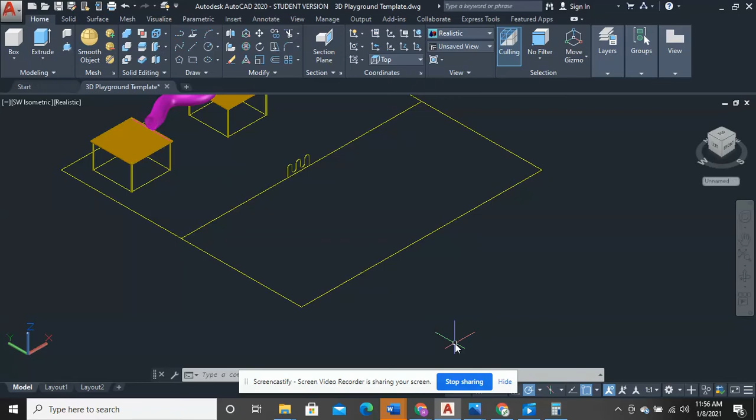So this is a second video for 3D basics. And what I wanted to talk about in here is some 3D do's and don'ts.

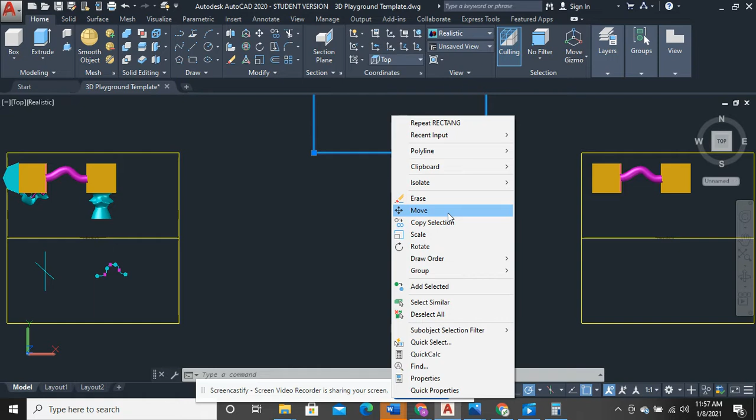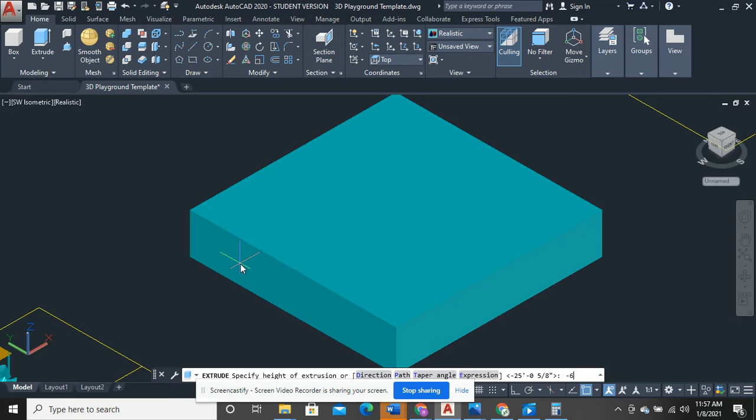I'm going to go down to a southwest isometric view. What I did was I extruded this, maybe 6 inches. Now you can see that this has thickness, and this is really the first tool I'm going to talk about: the Extrude Tool, the most basic tool that we have.

Here's realistic view, and I'm going to go to 2D wireframe. Now you can see that this playground surface has thickness, like a piece of concrete or something else. I covered this in the last video as well.

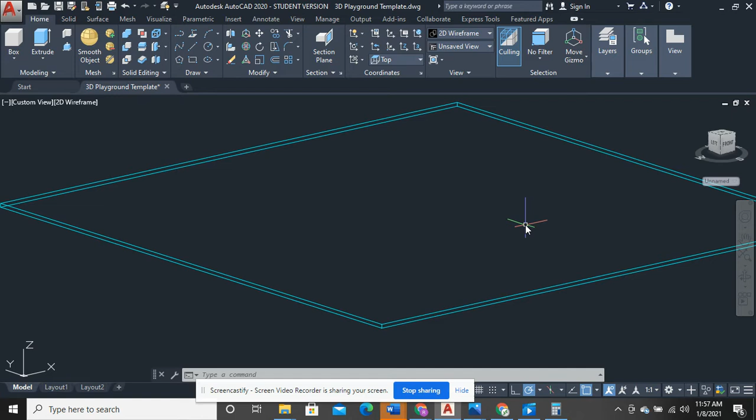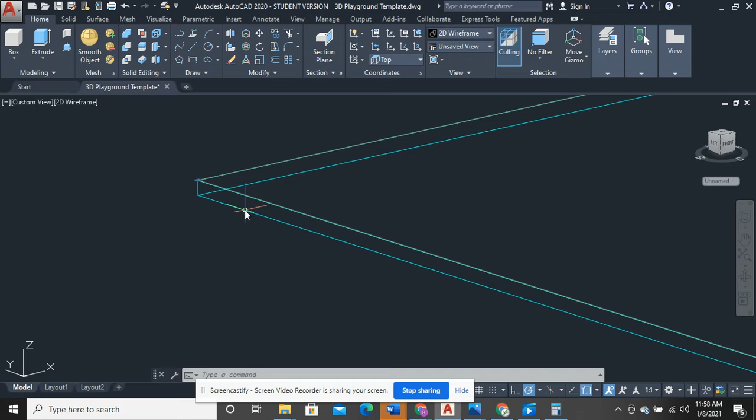What I said you'd want to do, the easiest thing, would be to use lines and go right along the top of the playground—the top surface of what you could call the concrete—making sure you're grabbing the top endpoints or intersections right there.

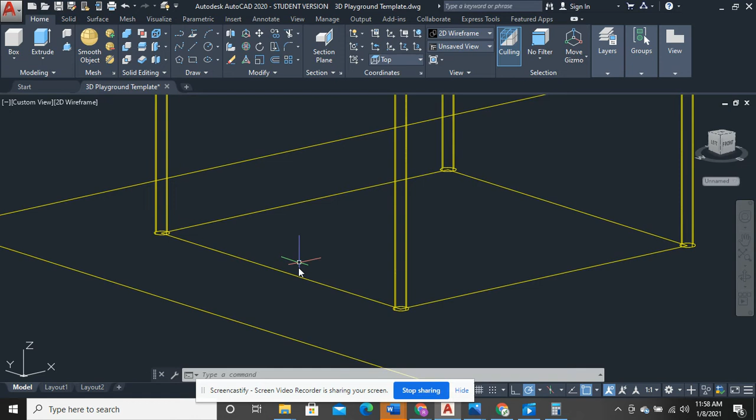Now I can go ahead and delete this, and I'll just have a square, which is going to be much easier for me to deal with. Partially because I can use these individual boundary lines as offsets, like I did here, where I wanted to make sure the tower was parallel to the outside of the playground and just a few feet over on both sides. I think I offset this 5 feet.

So the main purpose of this video is again to re-emphasize that all good 3D objects start as good 2D objects.

If I wanted to draw, I'm going to draw two squares. I'll say this one is going to be 10 feet—it really doesn't matter how big I make it—10 feet all the way around, 10 feet this way and 10 feet this way.

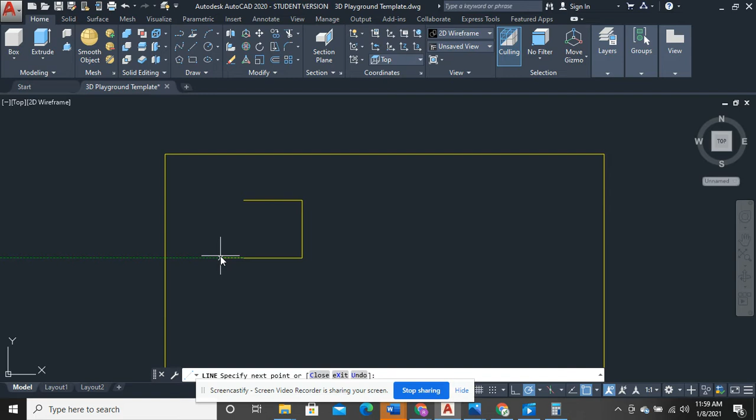Going back to the beginning of what we did in 2D, these are individual lines, versus a polyline, if I were to go 10 feet this way, 10 feet this way, 10 feet this way, and close it—you can see the distinct difference here.

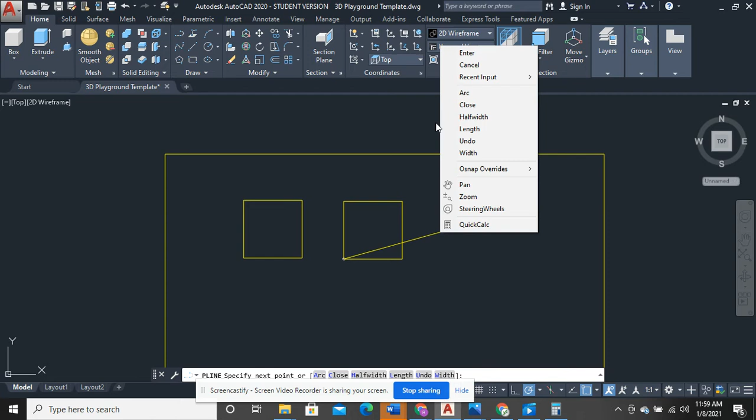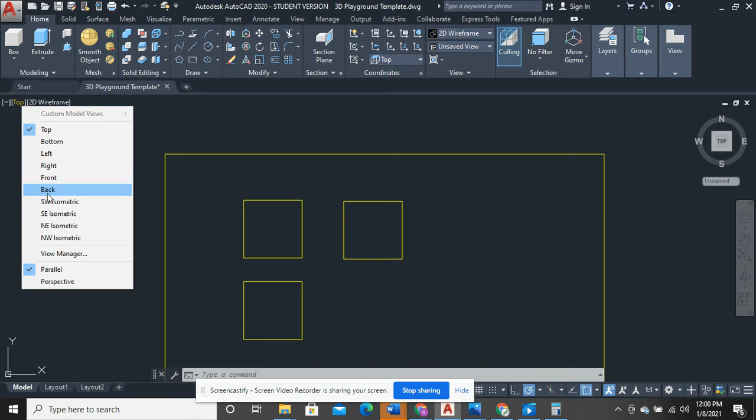When I hover over this, the entire square is a completed, linked surface—a closed loop, you could say. I'm going to copy the one here that is not a closed loop as well, just to emphasize another way of doing the same thing instead of using polylines. I don't use polylines that often.

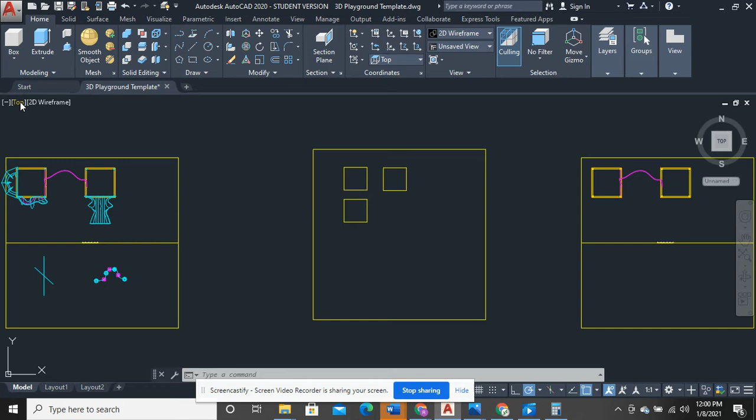So the most basic tool—look at what's happening down here. This is called the UCS icon. When we were in 2D, if I go to a top view, you can see I only have X and Y. X is right and left, and Y appears to be up and down, but it's actually not—it's forward and backward.

So when we go to a 3D perspective, which I just did by toggling here, I'm just going to constantly use this to toggle from here to here. You can also do that with the view cube up here—if I click on top, you can see sometimes it'll actually rotate you.

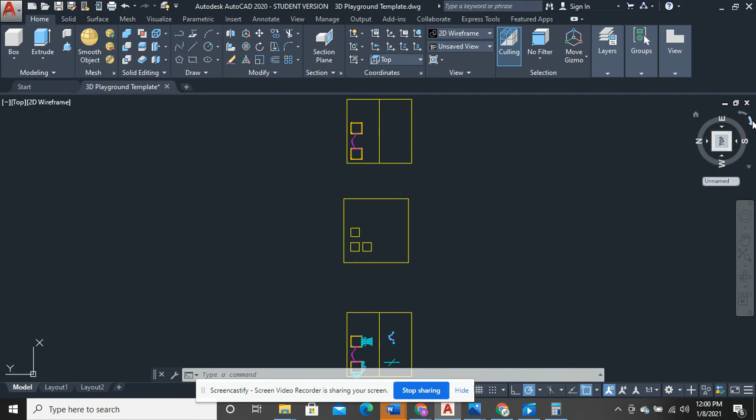So if top reads normal, then you are all set. And if I go to the home button, when I hover over it, it allows me to see that 3D perspective.

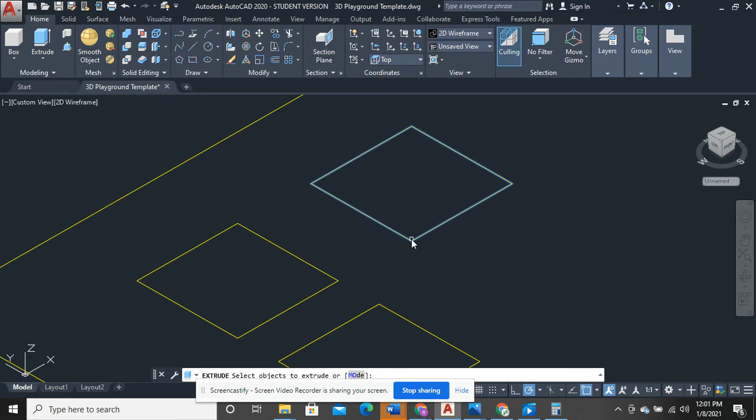Extrude is the tool that we use to convert 2Ds into 3Ds. So if I click Extrude and select this object, you can see this was a closed polyline, right? I click it, right click, and I can go up or down, typing in any distance I want, 5 feet, let's say.

Let me go to a realistic perspective, and you can see now that this is a complete solid. It is a solid block, just like a piece of cheese.

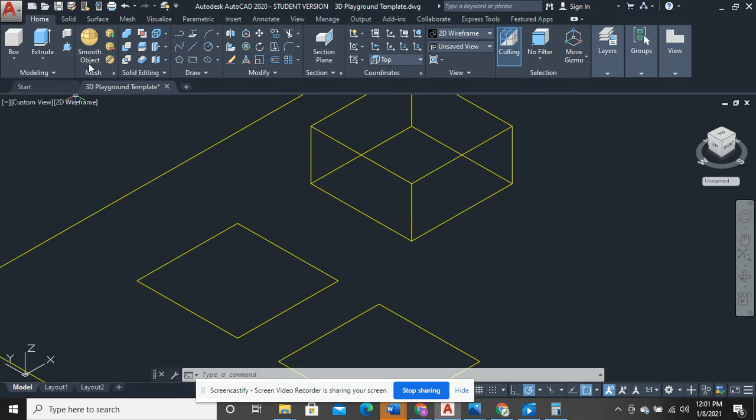But what I'm going to do here is go back, and extrude again these lines, going up 5 feet, the same distance. So why do they look different?

These are, let's go back to a realistic view, these are sheets of paper. When you see these bird cages, when you hover over them, this is not a 3D solid. These are literally like 4 pieces of paper that are being held up.

So what do you do? You're like, oh, I have to go back to the beginning and draw polylines instead of regular lines. Well, this is where that hotkey comes in: select it and hit letter J, spacebar. That has taken those 4 lines and converted them into a closed loop.

So again, if I use that same tool, extrude takes a 2D object and turns it into a 3D solid, and I go up, let's say 2 feet this time. So join is the way I got to that.

So that's really the most basic thing. Remembering also the importance of using these polar lines as guides. The polar button is right down here, and if I hit that, I want to make sure I'm on 90, 180, 270, 360. We've set it up in our perspective unit for 30, 60, 90, 120, but this will be much more helpful, and it'll give you a compass in this 3D space.

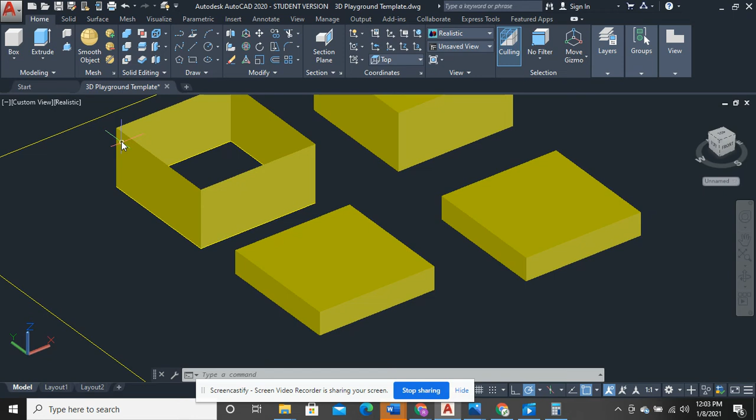So when you're moving or copying something, make sure you're doing it right. Like if I were to copy this, it looks like I'm just copying it and moving it to the right, but I'm almost sure that if I hover over this, sometimes it happens, sometimes it doesn't. I might have actually moved this up into the air or down below the ground. See there, that happened right there. It moved it down.

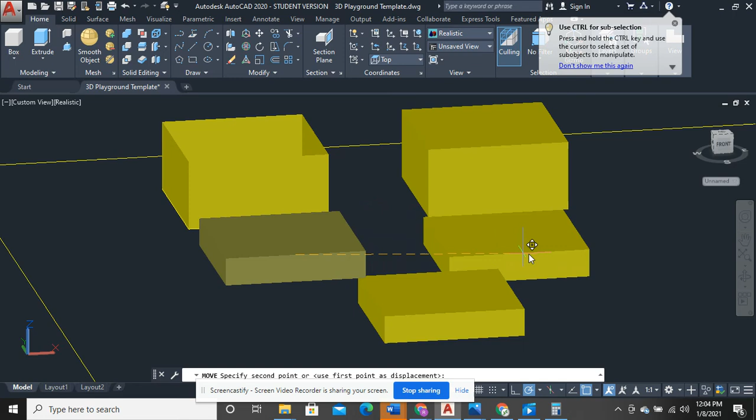Whereas if I were to go ahead and use that polar line as a guide, when I do this, you can see that line, my object stayed right on the floor. So again, to recap, make sure you are using connected lines, line segments, arcs, curves, whatever.

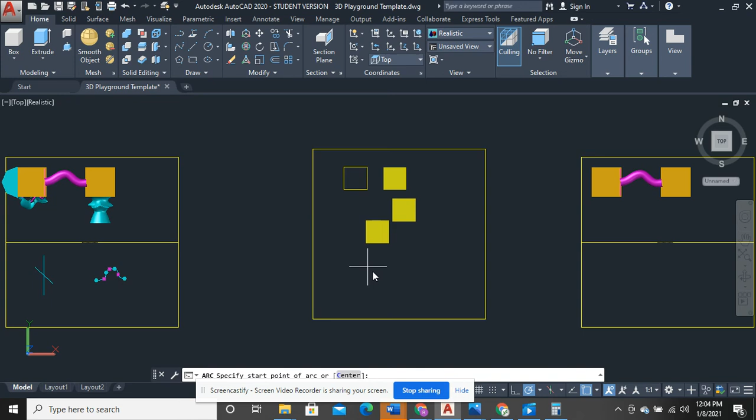Same exact thing is true if I'm using an arc or a curve. If I click here, here, and here, and I want to make a shape similar to this, I'm going to copy this just so you can again see the difference. Since I'm in a top view, when I moved it, I didn't have to have polar on because it's guaranteeing that everything is locked on the floor, right on the surface. So this one is an individual line and an individual arc.

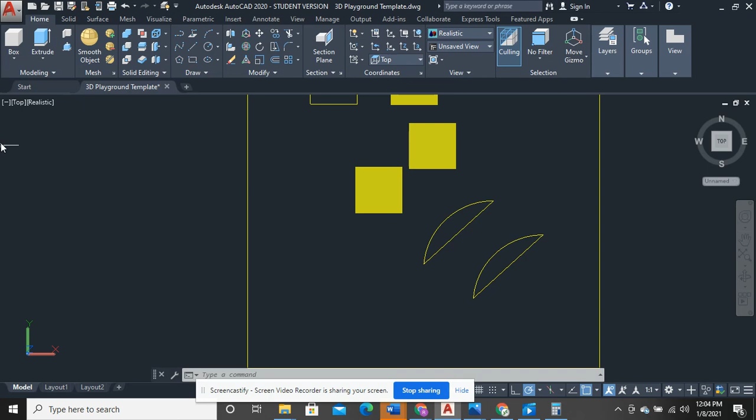This one is also, but if I select it, letter J, spacebar, go back to, when I try to extrude something in a top view, it just doesn't work. But if I extrude both, you can extrude multiple things at the same time, and you can see right here, that's a sheet of paper, and that is a solid.

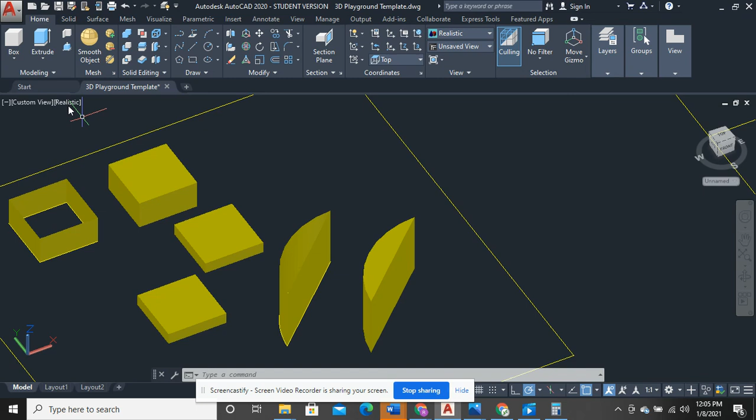So try that out. Good luck with it. Remember, this extrude tool we're going to constantly use.